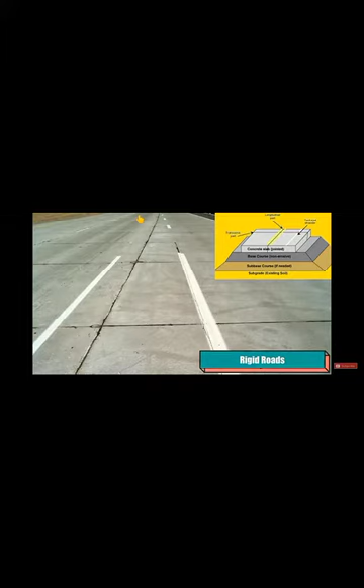Based on rigidity, roads are classified as flexible roads and rigid roads. Flexible roads are those made with asphalt roading, which are flexible enough. Rigid roads are made with concrete, laid over subgrade existing soil, then subbase course, base course, and a concrete slab. This is the composition of rigid roads.

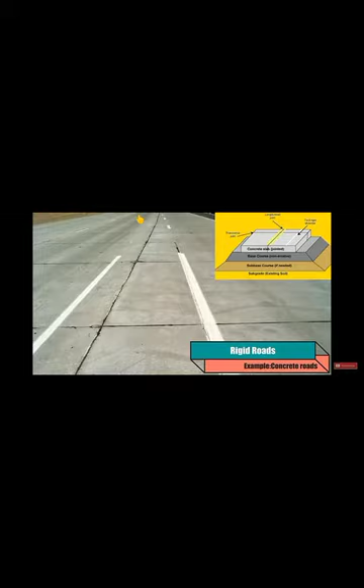Types of roads based on location and function: national highway, state highway. National highways connect all major cities and states of the country. Within national highways, like NH1, NH2, NH3, they are further classified based on road condition.

Next are state highways, which connect the major district roads, from district to district. These are major district roads. Next, district roads, provided within the cities, split into major district roads and minor district roads. Next, village roads connect nearby villages with each other, village to village, for the movement between villages.

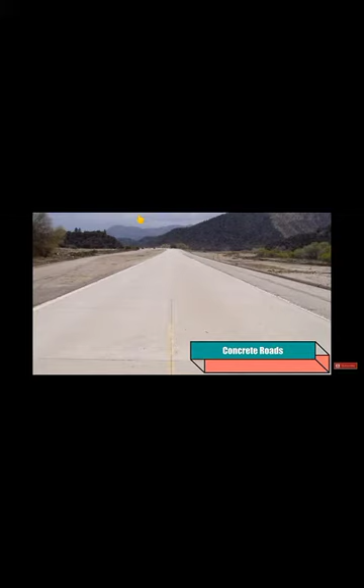What you can see is white topping. It is made with cement concrete with construction joints. Why have the joints been provided? Because the concrete is going to increase its dimension under loads and lateral pressures, and due to temperature, the volume of the concrete is going to increase. That's why we are providing the construction joints.

Now the classification is based on the topography. It is plain area roads and hilly area roads. This is not there in your syllabus, just for your knowledge. This is a plain area road, constructed on a level surface.

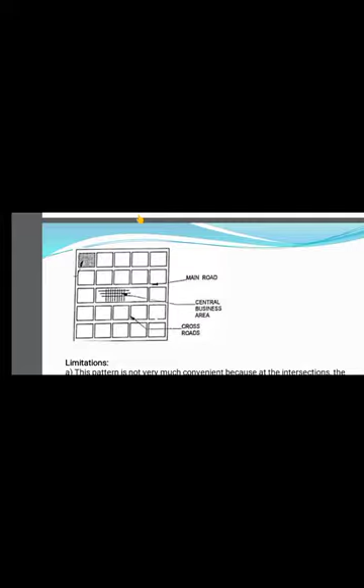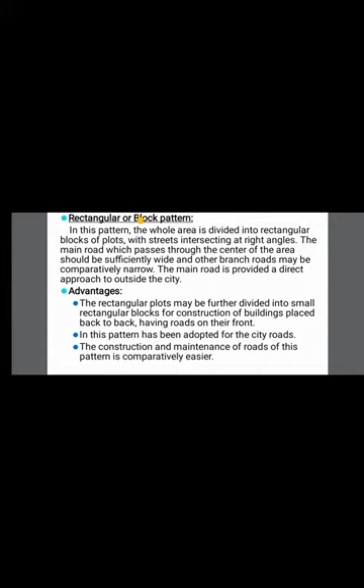Now we'll study the different road patterns. So one is rectangular or block pattern. You can see the figure here. This is rectangular road pattern. In this pattern, the whole area is divided into rectangular blocks of plots with streets intersecting at right angles. The main road which passes through the center of the area should be sufficiently wide and other branch roads may be comparatively narrow. The main road is provided a direct approach to outside the city.

See here, we are having one area. The area has been divided into rectangular blocks. The horizontal roads you are seeing are main roads. The main roads are a little bit wider than the adjacent crossroads. The crossroads are narrower. Main roads are broader and adjacent crossroads are narrower. The central area has been marked. Okay, this area is the business area. This is at the center of the block pattern, and it has been connected with the main roads.

From wherever the shopping and marketing is done, this road has been directly connected to outside the city. So these roads have been connected directly outside the city. These are the main roads for this business area. Then the other blocks have been made residential. For that they are provided the crossroads. The main roads and the crossroads are perpendicular to each other.

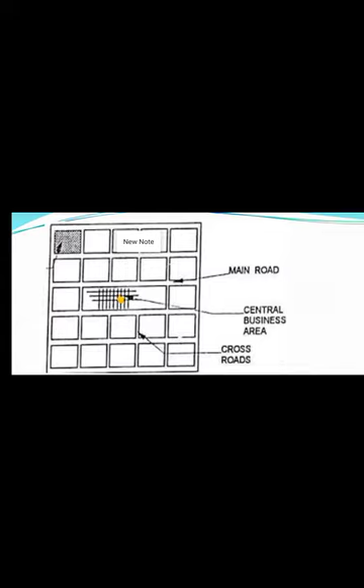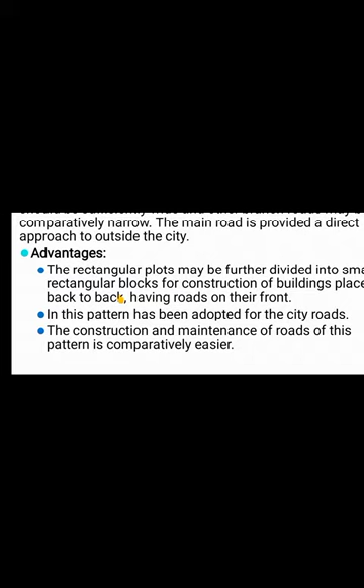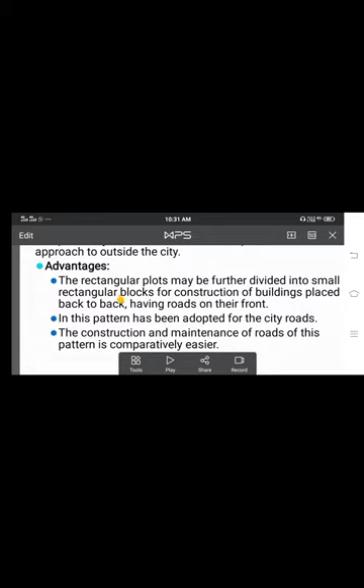Due to this we are having some advantages as well as limitations. So we'll study the advantages of this rectangular block system. The rectangular plots may be further divided into small rectangular blocks for construction of buildings placed back to back, having roads on their front. This pattern has been adopted for city roads. The construction and maintenance of roads of this pattern is comparatively easier.

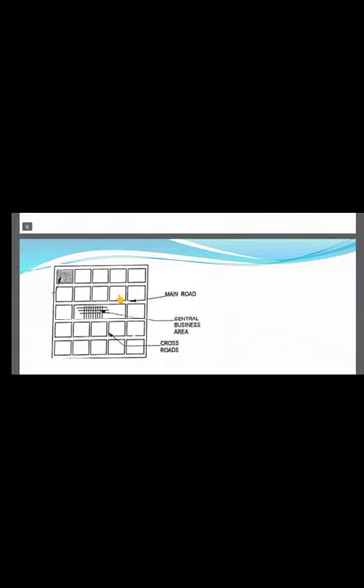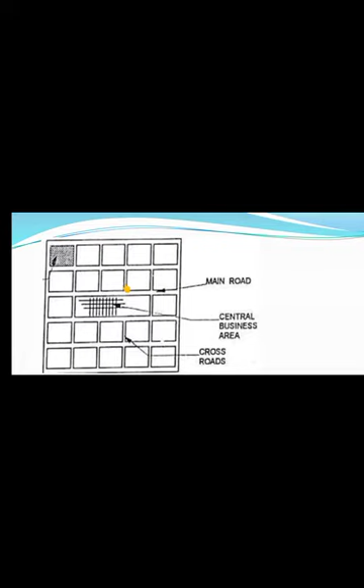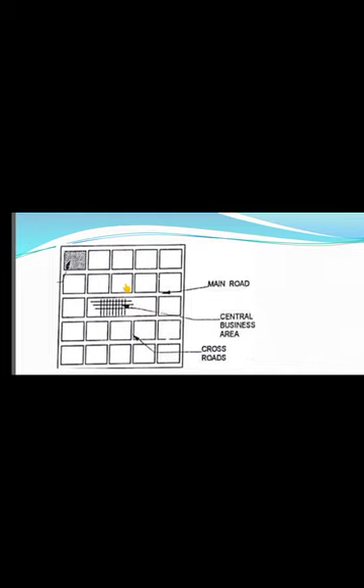What they are telling is, in whatever rectangular block we are having, the sites are going to be marked such that each house faces towards the roads, back to back. If you divide this rectangle into two, one faces one side and the other faces the other side of the roads. Because of this rectangular block pattern, the maintenance of the road system is easier and it is very convenient.

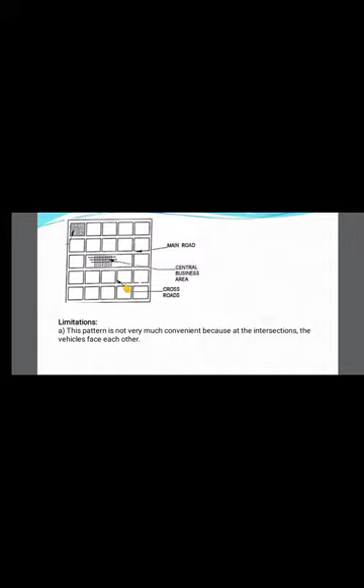The limitation is this pattern is not very convenient because at the intersection the vehicles face each other. Because the main roads and the crossroads are perpendicular to each other, at the corners or junctions of these roads vehicles face each other. So that is the one major limitation of this rectangular block pattern.

Now we move to the radial or star and block pattern. In this pattern you can see the figure, it is in the shape of a star, so it is called star, and it radiates outwards, so it is also called radial pattern. In this pattern the entire area is divided into a network of roads radiating from the business area outwardly. Here also the business area is at the center. From the center the roads go outwards in the radial direction.

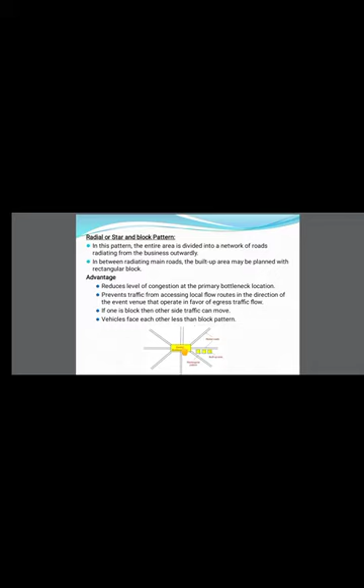You can see the central business area. Again we are having one main road. From this central area the traffic is going to be distributed in a radial direction. There is no crossroad for this, and the remaining place between these roads has been utilized for residential purposes. In between radiating main roads the built up area may be planned with rectangular blocks.

The advantage of this radial block pattern is it reduces the level of congestion at the primary bottleneck location. What it means is the traffic will not move only on one route; it has various radial routes. At the neck of the central business area it has various routes, so there won't be much traffic. If vehicles are moving on one road, another vehicle can take another road for movement from the central business area to outside the city, so there will be very less traffic at the neck of the business area.

This is one of the advantages of this pattern: it prevents traffic from accessing local flow routes in the direction of the event venue, which operates in favor of egress traffic flow. Here they are going to provide one or two roads for incoming vehicles and one or two for outgoing.

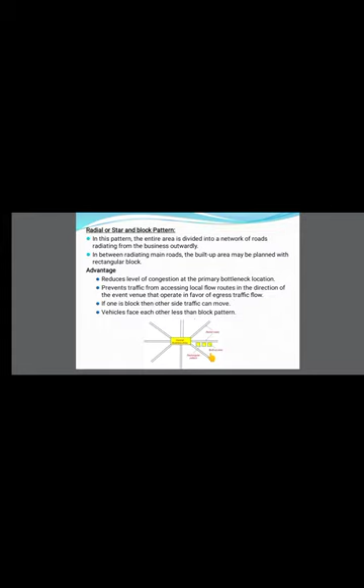So there will be less traffic in the area and there is no facing of the vehicles here. If one road is blocked, the traffic can move through the other side. There is less facing of the vehicles as compared to the block pattern.

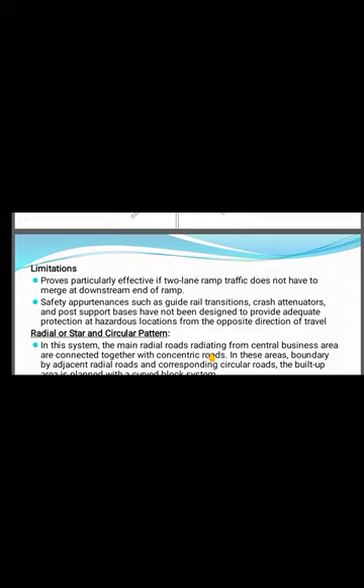Now the limitations of this radial pattern: it proves particularly effective only if two-lane ramp traffic does not have to merge at the downstream end of the ramp, and safety appurtenances such as guide rail transitions, crash attenuators, and post support bases have not been designed to provide adequate protection at hazardous locations from the opposite direction of travel. So these are the two limitations of the radial or star pattern system.

Now one more: the radial or star and circular pattern. It is radial as well as circular. In this system, the main radial roads radiate from the central business area and are connected together with concentric roads. From the central business area, the main roads run in the radial direction, and these main roads are connected by the concentric circles.

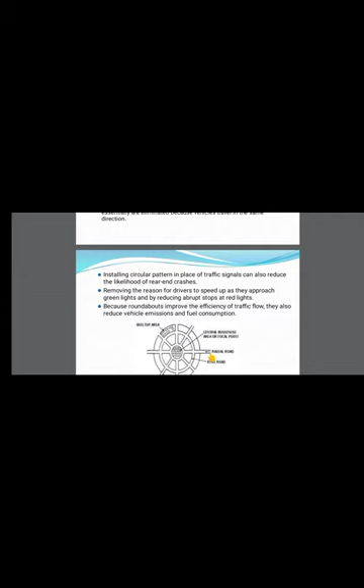In the areas bounded by adjacent radial roads and corresponding circular roads, the built-up area is planned with a curved block pattern. So within this, whatever area is there is used as the built-up area. Here we can provide residential areas.

At a traditional intersection with stop signs or traffic signals, some of the most common types of crashes are right angle, left turn, and head-on collisions. These collisions can be severe because vehicles may be traveling through the intersection at high speed. With the circular pattern, these potentially serious crashes are essentially eliminated because vehicles travel in the same direction.

These are the advantages. As there are no junctions, the vehicles move in a circle. After radiating in a radial direction, these vehicles take a circular path. In the business area, if the vehicles take a main road, there is a circular pattern. This circular pattern helps the movement of vehicles, so there will be fewer head-on collisions in the circular pattern of roads.

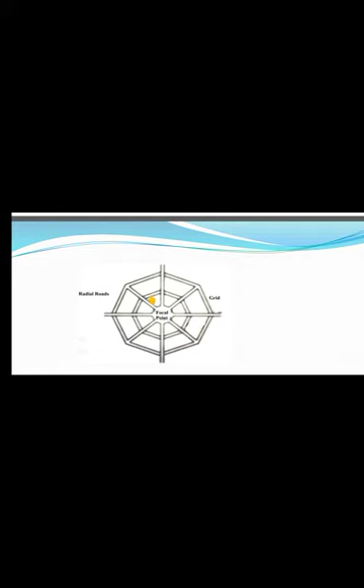Here you can see this radial block star pattern. The blocks are in the grid pattern, the movement will be in the radial direction, and the star pattern is there. Here the center is your business area, and they reduced the circuitousness by making it a star grid. There will be straight lines here, not circular. The vehicles move from this central business area outwards along these main roads; in the circular pattern they would take a roundabout, but here it is a straight pattern, so this limitation of the previous one has been eliminated.

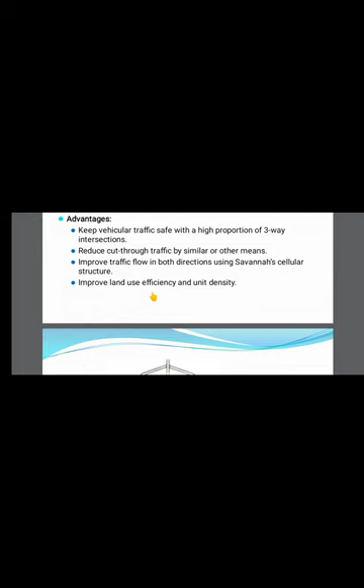The advantage of this is keeping vehicular traffic safe with a higher proportion of three-way intersections. By providing three-way intersections, cut-through traffic has been reduced, by similar or other means, with improved traffic flow in both directions using Savannah's cellular structure. This is called Savannah's cellular structure. It also improves land use efficiency and unit density. So these are the advantages of this system.

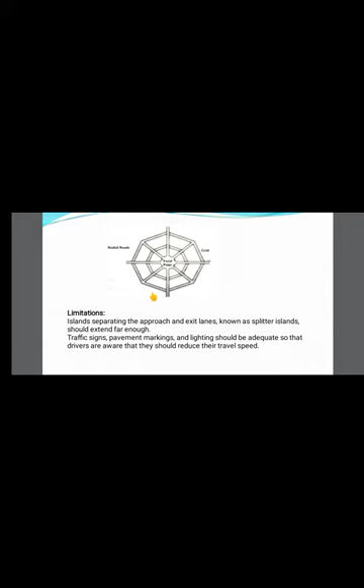The limitations are that the island separating the approach and exit lanes, known as the splitter island, should extend far enough. This is one of the disadvantages. And the traffic signs, pavement markings, and lighting should be adequate so that drivers are aware that they should reduce their travel speed. So a similar limitation will be there as compared to the previous one.

Next is the hexagonal pattern. In this pattern, the entire area is provided with a network of roads forming hexagonal figures. You can see the hexagons here. At each corner of the hexagon, 3 roads meet. The built-up area bounded by the sides of the hexagon is further divided into suitable sizes. Within this area, the residential blocks and plots are made. The advantage of this hexagonal pattern is that 3 roads meet at the built-up area bounded by the sides of the hexagon, meaning at any junction there will be 3 roads.

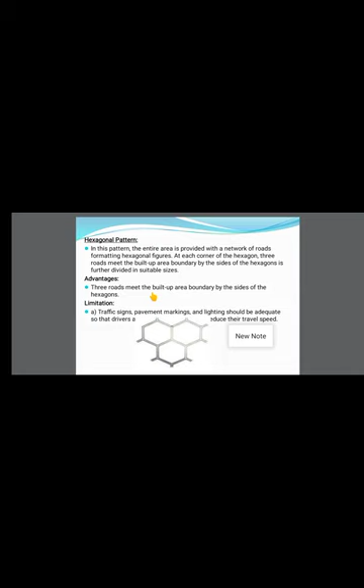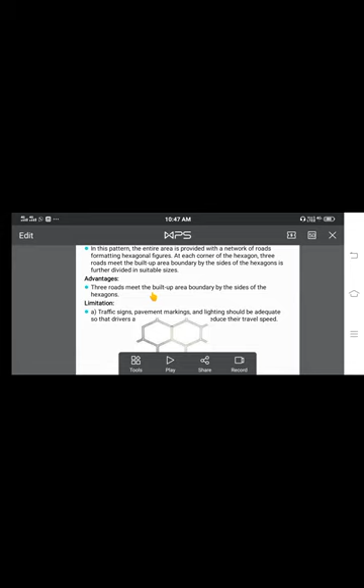The limitation is that traffic signs, pavement marking, and lighting should be adequate so that drivers can reduce their travel speed. Here also a very important thing is the marking of the traffic signs as well as the lighting, because at the junction 3 roads meet, so conflicts between vehicles are more here. For that purpose, the traffic signs and signals should be maintained properly. These are the different types of road systems, road patterns.

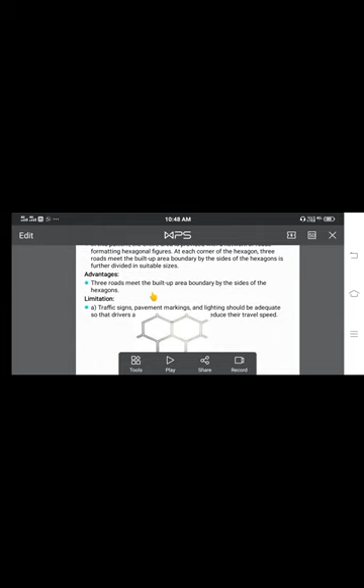Clear? So next we will study this again with the video, with the figure and the movement of the vehicles. I think you are clear with whatever I am teaching you.